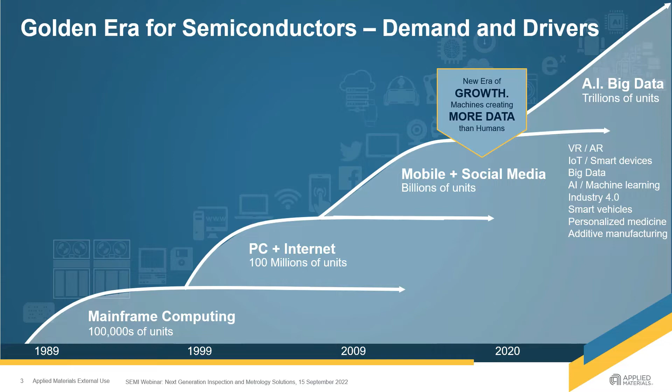The electronic devices we consume are basically composed of chips, and these chips are manufactured over several weeks to several months, depending on the complexity, with a few hundreds to over 1,000 process steps. During all these steps, it is critical to ensure that the process is within what we call the process window, so that the yield is high enough to ensure a functional and production-worthy electronic device. This is critical because one week of downtime at a 3 nanometer logic fab will result in a few tens of millions in costs. So it is critical to maintain the process within the process window.

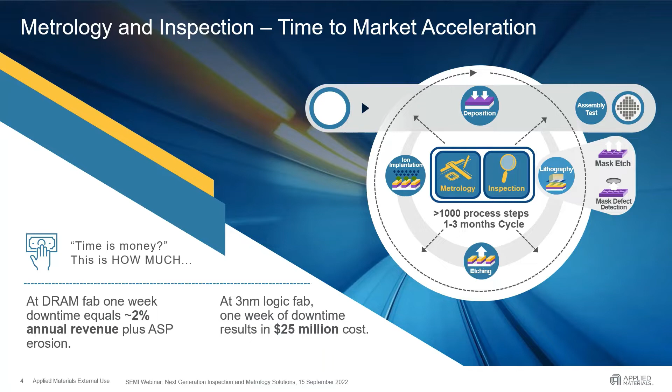At Applied Materials Israel, we develop process diagnostics and control solutions. We consider ourselves as the fab's eyes. We work at the forefront of technology to provide the wafer fab industry with patterning control and defect control cutting-edge solutions. Metrology and inspection enables chip manufacturers to see clearly into the process and accelerate time to market of their most advanced technologies.

There are many metrology and inspection challenges. Here are just a few of them. On the left, you can see the key challenge of design rule shrink. There are denser features that need to be imaged, and smaller defects become killer defects. Next is transistors, which several years ago became three-dimensional. These complex geometries have trenches and sidewalls, all of which need to be characterized. New materials were introduced, and there's no line of sight.

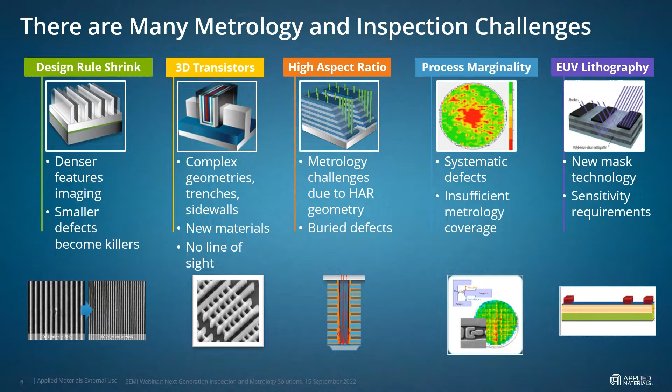So just a few words about process control. Here we can see a process window of any parameter. In this case, we chose a circuit performance example, and we can see two distributions. Here we look at the speed of the transistor. We can see some kind of variation in the speed of the transistor, and circuit performance is gated by the slowest transistor. Lower transistor variability means higher device performance. So really, the objective of process control here is to get the mean to target and control this parameter to a very tight window.

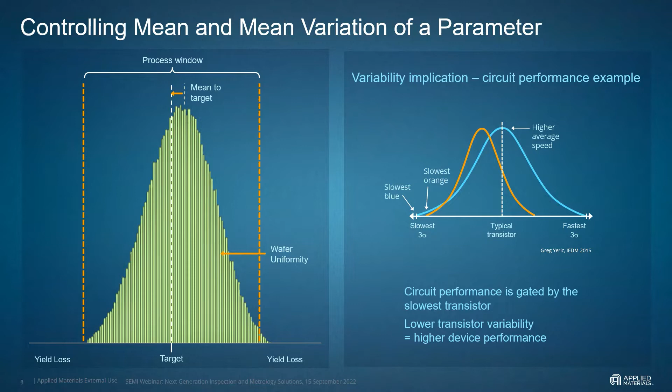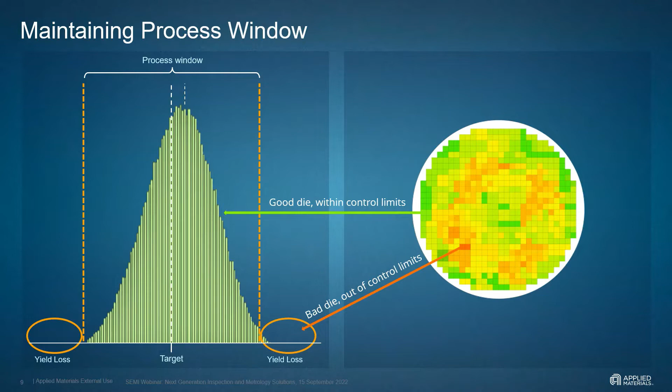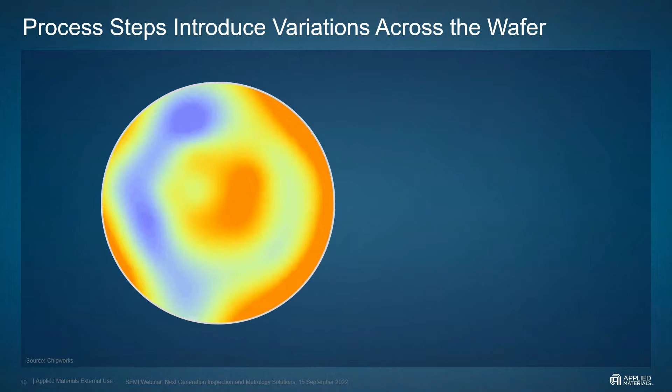Here, for example, these distributions may indicate various performance across the wafer, with the red dots indicating a bad die, which is out of the control limits, and the green dies indicating good dies within the control limits, but still there's a distribution of these parameters. So process steps introduce variations across the wafer, and in this example it's truly across the wafer, but we can also look at other spaces of variations which we need to control within.

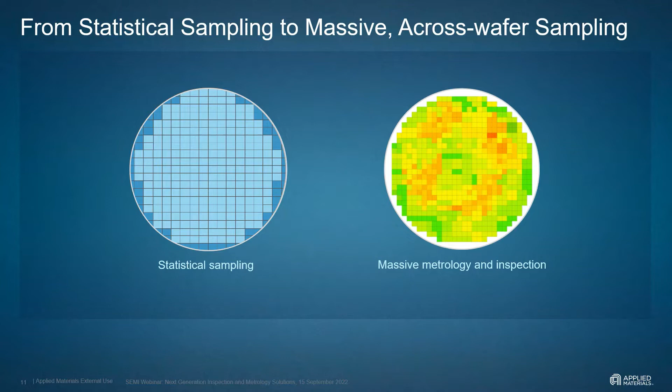So here we see two extremes. On the left, we see no sampling of a wafer - we have no idea what is happening. On the right-hand side, we see massive metrology and inspection information. Just imagine you have only a few sampling points - you can barely see the picture or understand what's happening on the wafer. But if you improve your productivity or your sampling and increase that to a level of massive sampling, you begin to view your image. Finally, you can see the big picture. So massive sampling reveals hidden information.

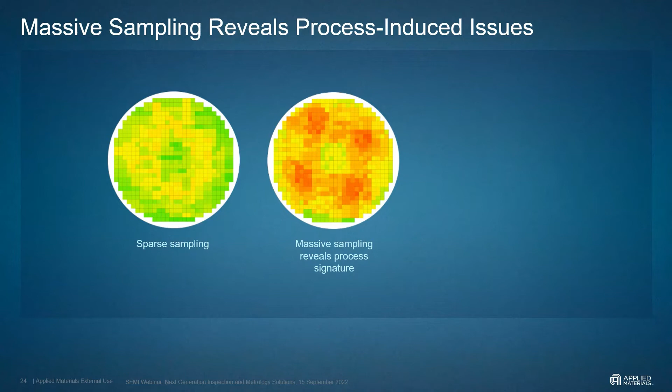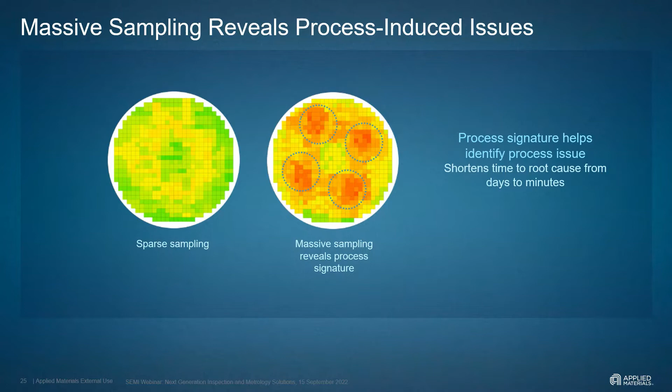So obviously, you need to increase your sampling to extract that information. Here's a beautiful example - here's a sparse sampling of some kind of parameter across the wafer. And here we see more massive sampling, which reveals some kind of a signature. The more sampling that we apply, you can see eventually a true signature, which helps identify a process issue, and this shortens time to root cause from days to minutes. So it's really important to have massive sampling to reveal process-induced issues.

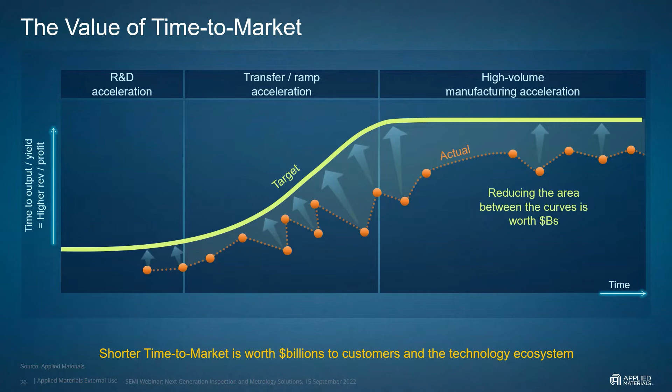Let us move now to Applied Materials Israel's main task in MADEin4. We had multiple tasks, but two were significant. The first was about optics wafer inspection, and the task was to improve optics wafer inspection sensitivity to keep up with the shrinking size of killer defects and provide new information, while improving throughput and productivity, which we did through new optics, high performance computing, and overall system design.

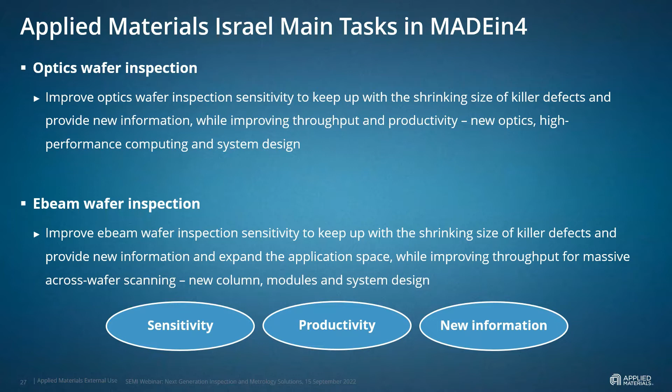The second main task was about e-beam wafer inspection, and the idea was to improve e-beam wafer inspection sensitivity to keep up with the shrinking size of killer defects, provide new information, and expand application space, while improving throughput for massive across-wafer scanning through development of a new column, modules, and system design. Overall, we improved sensitivity, productivity, and provided new information related to defectivity and metrology.

Our developments in MADEin4 were made possible through multiple collaborations. We collaborated with Leti and IMEC, who provided us with advanced wafers used to validate our developments. We collaborated with Nanomotion on stage and positioning, and with Mentor Graphics, providing them raw data for their development of new metrology through across-tools machine learning analysis.

We collaborated with ICT, which developed the e-beam inspection column. We collaborated with OKO Technologies on the development of the bright field optical inspection concept, and with ProDrive on bright field image processing and data handling for the tool's image processor.

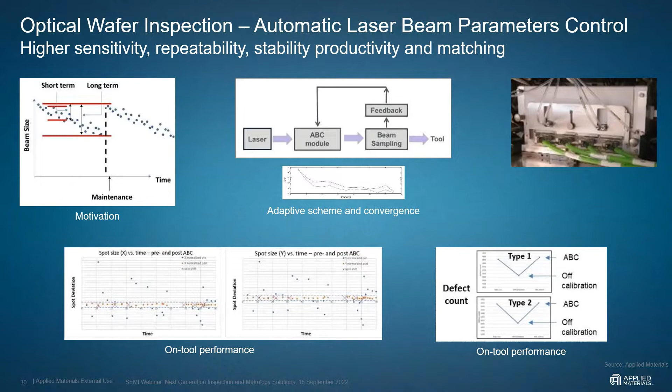You can see here defect counts for two types of defects, type 1 and type 2, at three points of measurement. The left measurement is an ideal, well-calibrated tool. The midpoint is a tool after we let it degrade for a long time, then commanded the module to recalibrate the tool automatically; after recalibration, the defect count improved. So if this is done automatically during production, we maintain high sensitivity, stability, and of course matching.

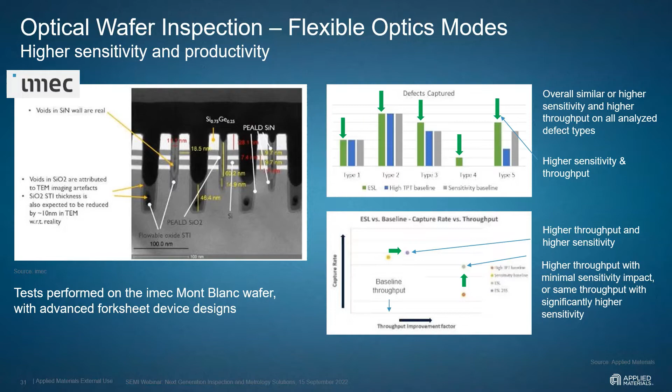Coupled to the developments of the optics, we also developed a high-performance computing system, and the main challenges here were to manage high data rate acquisition channel with incoming data rate of tens of gigabits per second, execution of parallel computer vision algorithms and advanced deep learning algorithms, massive real-time processing power to support complex algorithms, and massive data communication with advanced periphery systems and huge storage volumes.

This architecture needs to be scalable to support future algorithms and computing technology, namely hardware and software. We also need to address environmental requirements such as low power consumption and heat dissipation limitations, high reliability requirements, fab node restrictions and limitations, computing system cabinets and footprint limitations, and everything must have high cost performance in order to meet cost targets.

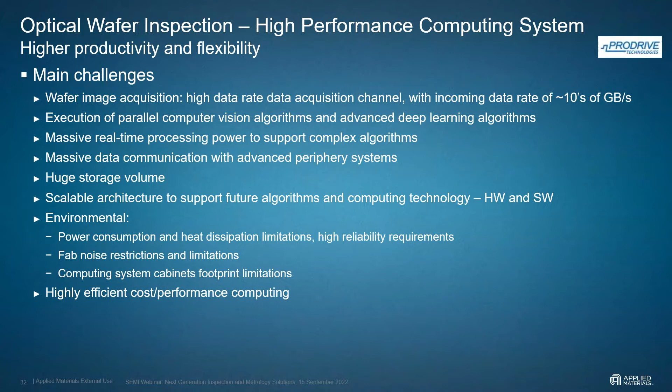This development was conducted together with ProDrive. So the methodology we took in this development was the use of off-the-shelf components, hardware and software, including open source, to accelerate development time. But the use of off-the-shelf components implies that the focus moves to a system which required optimization.

Optimization of hardware and software architectures, processing dispatching, load balancing, and the solutions included the use of tailored server architecture for the specific use case, use of accelerator and GPU for specific use case, and design of data acquisition platform detectors with off-the-shelf components. And here we can see a snapshot.

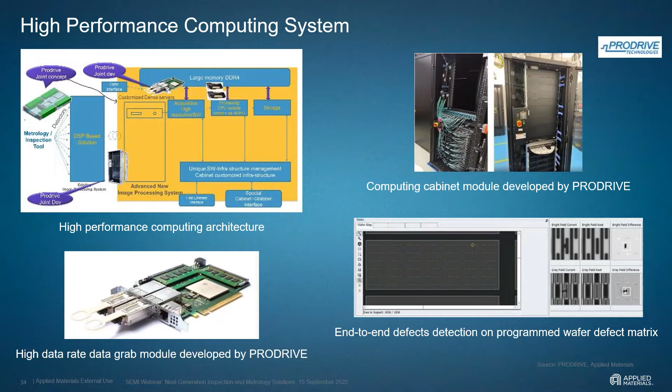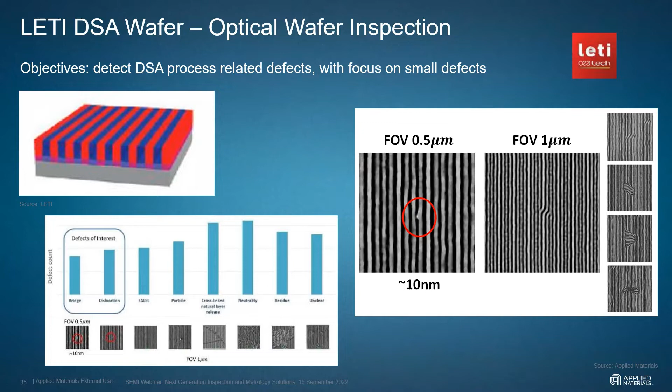In addition to this work, we also provided significant massive raw data to Mentor Graphics for their development of machine learning algorithms to provide new metrology information for analysis of data acquired by various inspection and metrology tools.

So we received 10 wafers from IMEC, and we scanned each of these wafers by multiple modes and provided the raw data to Mentor Graphics for their analysis using the various signatures that we found, which combines various metrology tools for improved metrology, and this will be reported elsewhere.

The second main task we had in MADEin4 was about e-beam wafer inspection, and the motivation here was higher sensitivity and productivity. So in order to improve the throughput or productivity, we increased the current density of the source.

And in order to improve the imaging performance, we developed a new detector, and we improved the landing energy of the electrons to provide more information about the wafer that we're scanning. The new key modules include a new column developed by ICT with new detector, new electron emitter and improved detectors. System development includes electronics and controls, motion algorithms, and new acoustic enclosure.

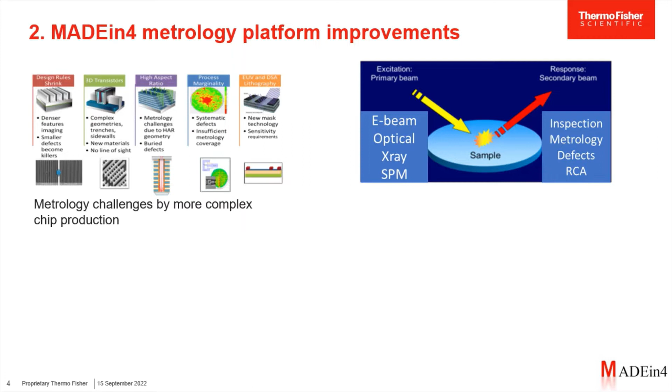In the MADEin4 project, we have been looking at metrology platforms based on electron beam, optical, X-ray, and scanning probe microscopy techniques. The main challenge is a throughput challenge: at high resolution we have to probe smaller volumes, with smaller interaction volumes, so we have less signal. At the same time, we want better signal to noise in a shorter time. To achieve this, the MADEin4 project has worked on better sources, better detectors, new modalities, improved sample handling, and a lot of automation and software development.

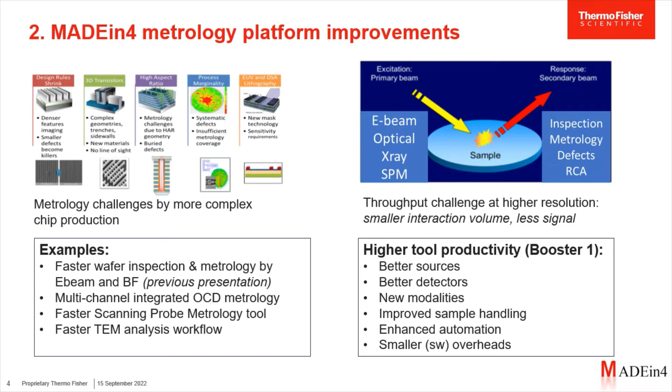I will discuss a few examples. I'd like to point out that the first example has already been discussed in the previous presentation, around faster wafer inspection and metrology tools.

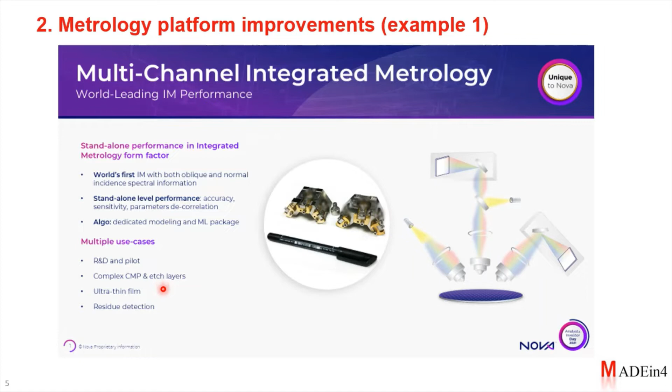The first example I want to briefly discuss is work performed by Nova on optical OCD. What they have achieved is to develop both a standalone and an integrated new OCD tool, which has added functionality of extra optical channels. This means they're able to obtain more information from a sample, and because it's integrated into the process tools, it's also faster and has faster access. They have multiple use cases, both R&D and pilot line, as well as for complex CMP and etch layers, which they are measuring.

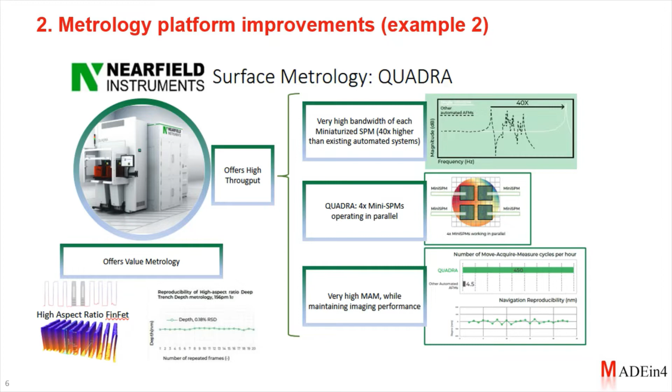As a final example, I want to spend a bit more time on the work we've done at Thermo Fisher around the TEM workflow. The TEM workflow is ideal to obtain local atomic scale information, and what we've tried to develop is to do this also at high volumes. The TEM metrology workflow starts with a wafer, then uses a dual beam device to cut very tiny TEM lamella out of that wafer - tiny meaning on the order of microns. Those lamella are then transported into an electron microscope, which yields all types of different information, including both dimensional metrology and compositional analysis.

The first challenge to address is that those minute TEM lamella need to be transported from one tool to the other. In the framework of the MADEin4 project, we developed, with the help of the SEMI organization, a standardized TEM lamella carrier, which is indispensable for automation, enabling further automation of the transport of these TEM lamella from one tool to the other.

A second challenge addressed concerns automation. To appreciate that challenge, it's good to explain that there are many different questions being asked of the TEM tools - this could concern dimensional metrology, inspection, or compositional analysis using energy dispersive X-ray, and each customer has different questions for each sample. So what we have to do is automate the acquisition of data while retaining flexibility for the customer.

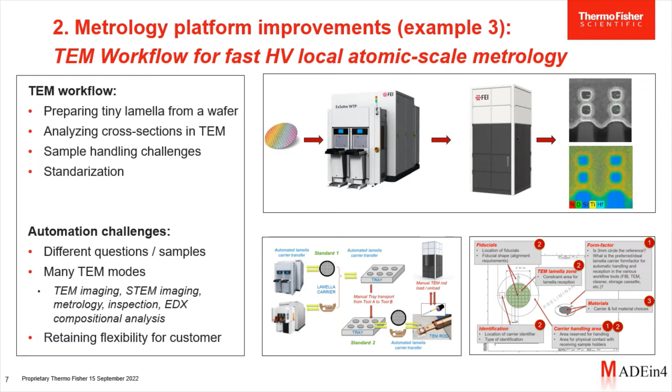The work in the MADEin4 project has led to a dedicated application software we call Smart Automation for the TEM workflow. This Smart Automation doesn't only automate the acquisition of the different types of data desired, but more impactfully also helps automate the setup of experiments, empowered by machine learning. After the process is started, the user is guided through a series of steps, questions, and automated image acquisition to set up the experiment.

This ranges from imaging the TEM lamella as a whole at very low magnification, aligning the TEM lamella with respect to the electron beam, and then zooming into the device line - in this case, a gate-all-around structure. Then the experiments are further defined to either acquire TEM data or, if required, acquire STEM data using a scanning probe, which can then also be used to acquire energy dispersive X-rays to generate compositional maps and profiles.

Once the experiments are set up, an experiment card is generated in which all the data are put together to really run the experiment.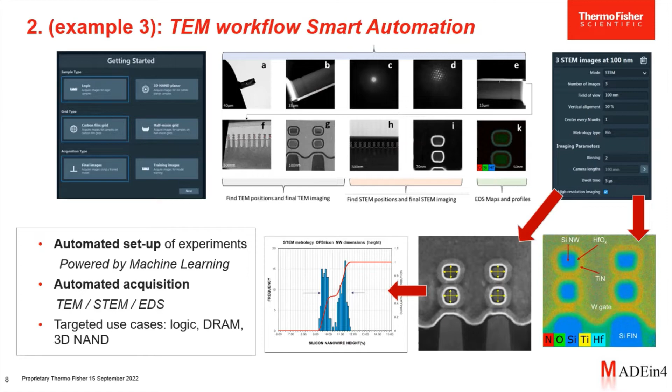As a final topic for this presentation, I would like to touch upon the use of metrology platforms in industry environments.

The way how this can be viewed is to see them as cyber physical systems. They are cyber because they're connected in their software to other tools and to the fab host and things like that. But they're also physical — we're not talking about web applications.

In the framework of MADEin4, we have worked on various parts of this evolution. In the previous slides, I already showed smart acquisition and smart tool setup, which relates to visibility and transparency, so that the user knows what is going on in the tools.

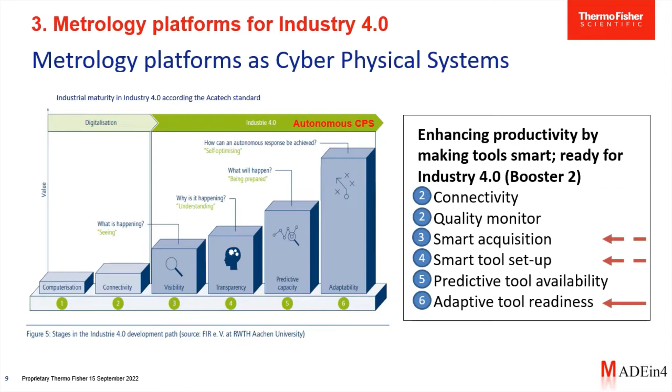In the final slide, I would like to briefly touch on the area of adaptive tool readiness. Tool readiness is a very important part of the cycle of running jobs, checking the status, and if the status is not okay, measuring and validating what the status is, then performing corrections on the tool. Report on those corrections — if they cannot be done automatically, surface that and call for help. If the report is positive, the next job can be run.

I already explained that the TEMs are very versatile tools, meaning many different parameters need to be checked. We have identified about 18 critical tool alignments which need to be checked on a daily or at least a weekly basis. By running them automatically, we're also able to be less dependent on the operator skills needed.

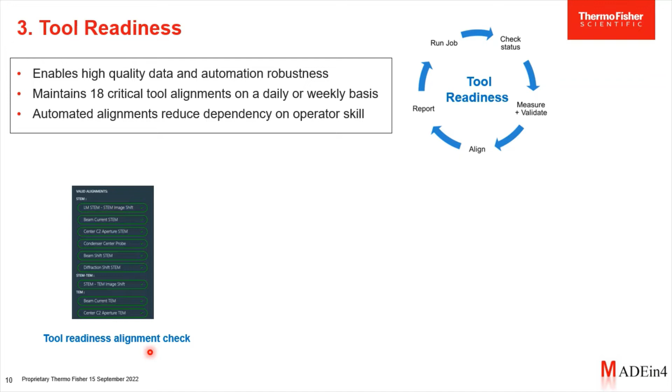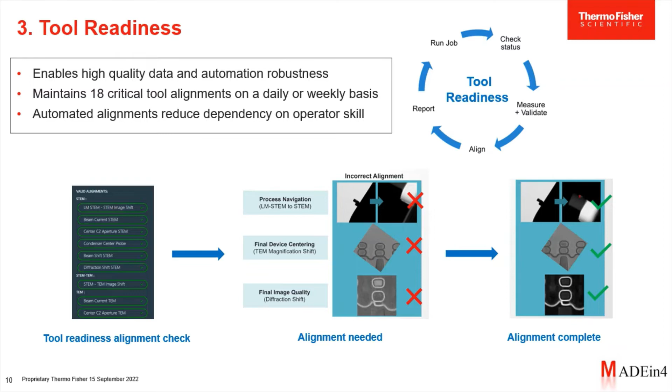The tool readiness checks are adaptive, and that is an important point. It's not that all parameters are aligned once a week, but the alignments are called by the experiment. So if a certain experiment is being performed or wants to be performed, it automatically checks whether alignments are needed, for instance for process navigation or device centering, or whether image quality was still sufficient from the previous job. If the alignments are not correct, those specific parts are performed until correct, and then the tool is ready for further use — this is adaptable tool readiness.

This has led to an automated STEM metrology workflow, which we sometimes refer to as fourth generation automatic STEM. I've explained that this uses smart automation, dedicated application heavily using machine learning, but it also calls upon smart alignment features and tool readiness in an adaptable way.

As a result, more consistent data can be formed, and there is constant monitoring of data quality. We're able to perform dimensional metrology with less than 1% accuracy. This means higher volume TEM data can be obtained much faster, making these tools also relevant and important, together with other tools, to work in an Industry 4 type environment.

This leads me to the conclusions on the metrology platform developments. I've shown that the main challenge which has to be addressed is to enhance the productivity, but at the same time address the higher complexity of the samples under investigation.

I've presented a couple of examples where significant improvements have been reached in platform development: not only the TEM metrology workflow of Thermo Fisher, but also the inline and integrated multi-channel OCD tools of Nova, and the multi-head scanning probe microscopy tools from Near-Field Instruments.

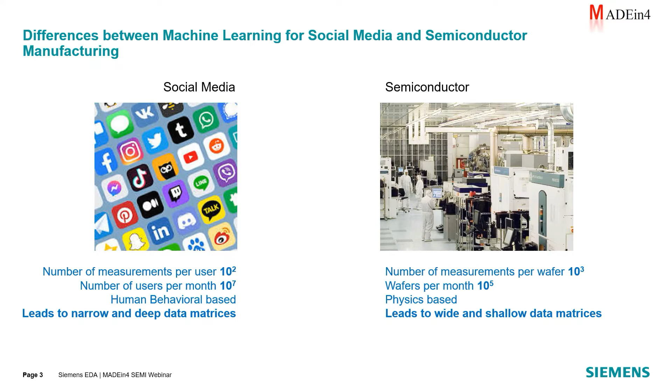The first example is for a single process, in this case chemical vapor deposition. We want to have a model that is able to describe how a distinct set of populations in which we have low thickness, medium thickness, and high thickness behave, because there are three distinct technology nodes that are being manufactured within the same manufacturing tool. This provides a benefit in the sense that we can actually utilize the behavior of all of these products that are being processed at different technology nodes in the same tool and basically leverage the information across each other.

We demonstrated what is the benefit of incorporating design features — in other words, the ability for the model to learn what happens in other technology nodes or from other different products in order to fully characterize the process.

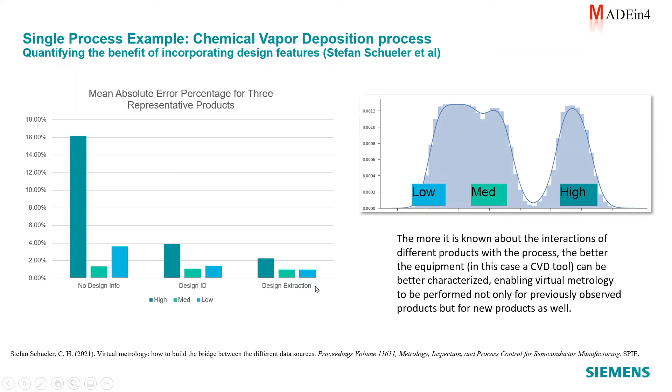This is another example. We want to identify the root causes of abnormal conditions. After we have generated such models, we can identify what are the characteristics or what are the parameters that lead to low thickness conditions or high thickness conditions.

Machine learning techniques like SHAPley allow us to determine what the main contributors are. While the first two contributors correspond to a previous metrology measurement and a process parameter, you will see that what makes a product have low thickness condition depends on certain design parameters, metrology parameters, and process parameters.

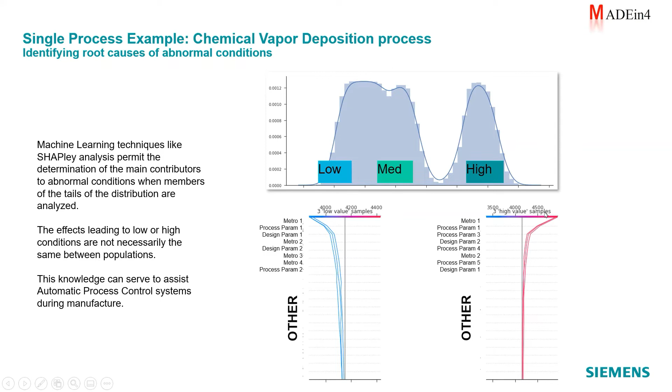But this order changes when we look at some of the higher conditions. In other words, the characteristics that lead to a low thickness or a high thickness condition are different. This allows us to identify the root causes of the conditions leading to out of control thickness.

We describe how feature engineering is paramount in order to successfully utilize all of the information present. In this case, for an electroplating tool, we need to undergo feature engineering, understand the physical behavior of all those different parameters, extract characteristics relevant to them, and then create traces within time of those newly extracted conditions.

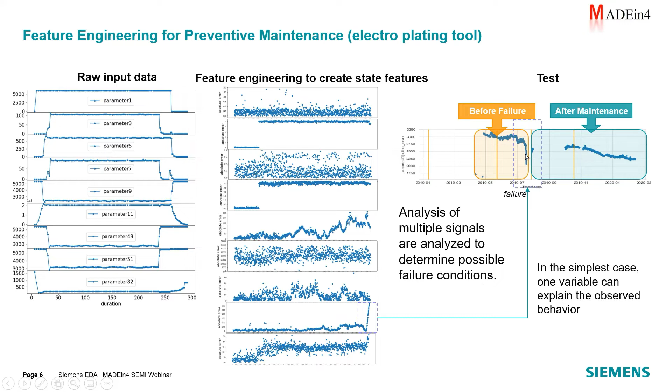In the simplest of cases, one variable can actually explain the observed behavior, and therefore that can serve as the indicator that preventive maintenance needs to happen. Not all systems are as simple.

In the case of a chemical vapor deposition tool, we have raw input data that has been collected. We perform feature engineering to characterize how that raw input data changes over time, and that creates a trigger model that is able to identify and forecast when the machine will actually be out of control.

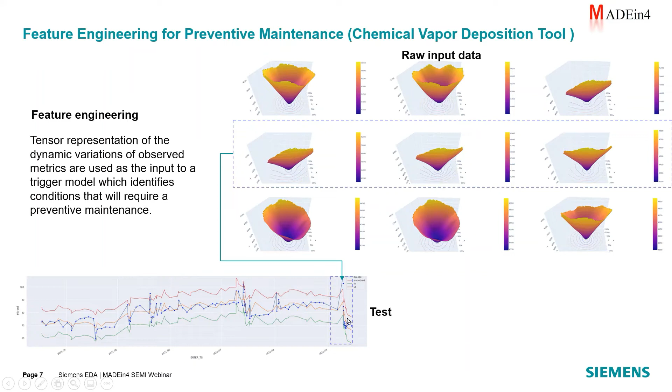As data is being collected during manufacturing, you're going to have some amount of data. There is going to be a delay in which this data is then processed from the point of view of training. During prediction, a model is used to monitor the behavior of that particular process, but when new data becomes available, that should trigger the characterization of new models.

One of the biggest questions about machine learning is, how do we know that we are improving our model? We can perform an analysis of the contributors.

What is the difference between these two columns, pre-MADEin4 and post-MADEin4? In pre-MADEin4, the state of the art is that virtual metrology relies on individual models that are interpolating within those types of measurements. So we will have, for example, one metrology step, another metrology step, another metrology step that are not fully measured.

However, when we want to make a prediction on the e-test, what happens? What happens is that we don't necessarily have a full stack. We do not know, in that particular region of the wafer, what some of the other observations were. With the work we have done in MADEin4, we can actually construct a full description of how every single process step is virtually constructed.

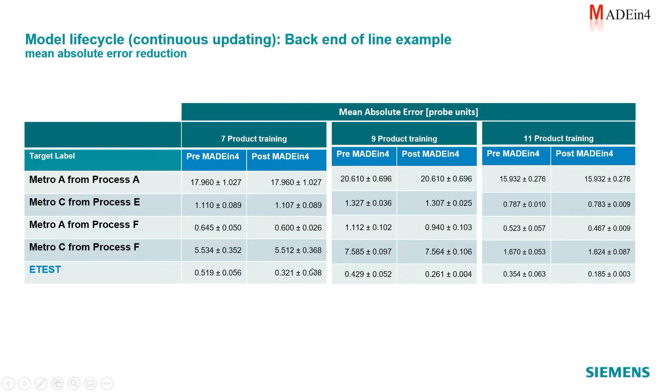That means that for every single point we have at the end, in this case the electrical measurement, we have a full stack of the different measurements accounted for. We can see how, from the point of view of e-test, the error decreases from 0.3 to 0.26 to 0.18, but also the confidence interval gets tighter. Something that, again, illustrates this problem of very low sample conditions.

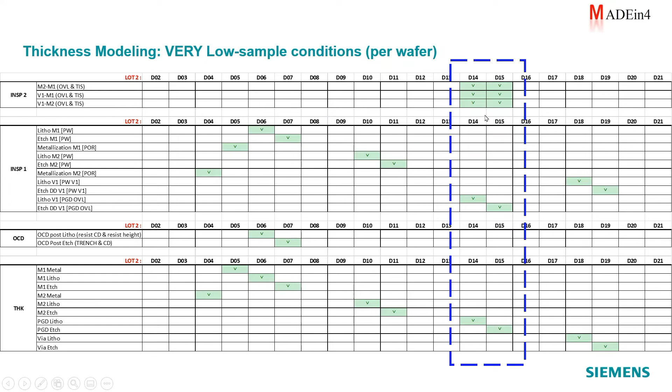We want to generate a model for these 2 individual wafers that explains what the thickness is, and we're going to consider what happens when we add information from inspection tools. What we can already start seeing here is that while some thickness values improve and others degrade, the improvement or degradation in model quality under these low conditions is an indicator that other effects are present.

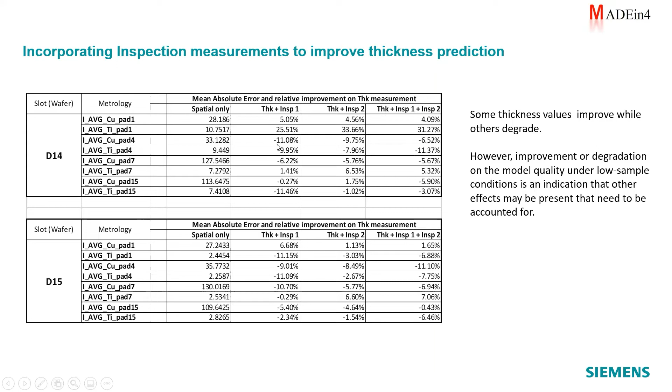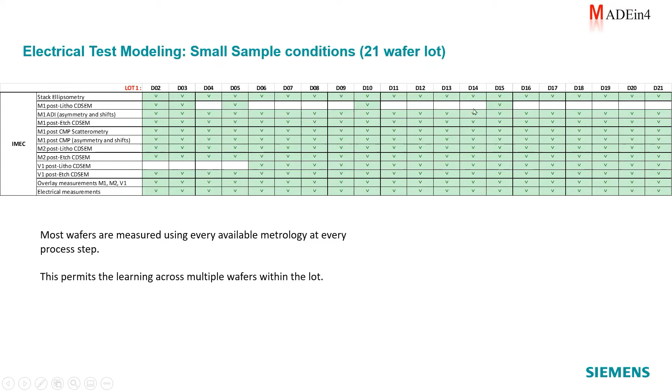So let's take a look now at a case in which most of the wafers are fully measured, and this permits leveraging learning across multiple wafers within the lot.

Now, what happens if we have a large sample size? When we have thousands of wafers, we perform a very similar analysis in which we want to take a look at, after the full process sequence, what are all of these different targets or probes that need to be extracted that are able to identify what is the benefit in the electrical test.

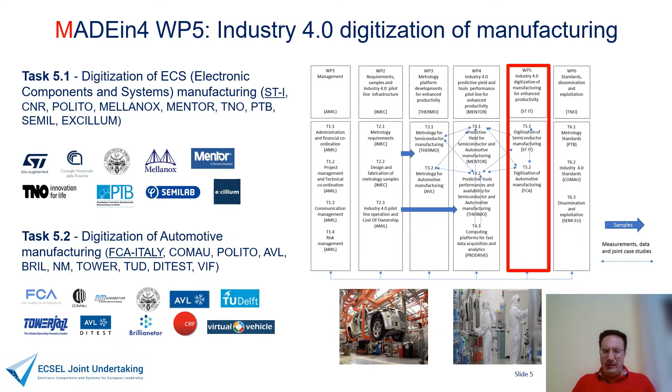In any case, we have the opportunity to collaborate tightly with a lot of partners coming from other work packages. For example, work package 3 for tool and metrology partners, work package 4 regarding development of new algorithms and methods, and it's very important also the interaction inside work package 6 regarding synergy and standardization.

For our work package, the main objective is focused on IoT methods and new metrology tools. This is a task very important to increase productivity, but first of all to speed up the development of new products and new technologies.

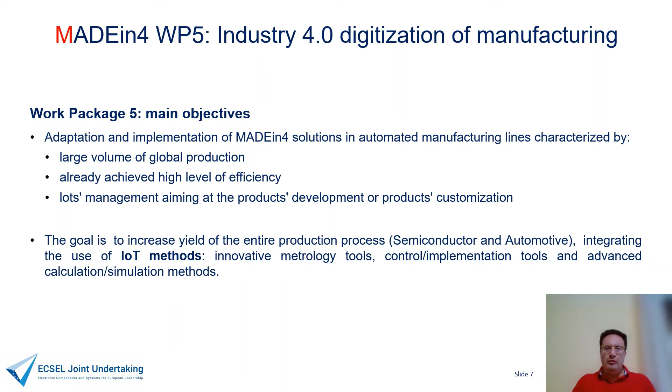In particular, regarding work package 5.1 for semiconductor environment, I have the opportunity to describe some use cases and the main results that we achieved.

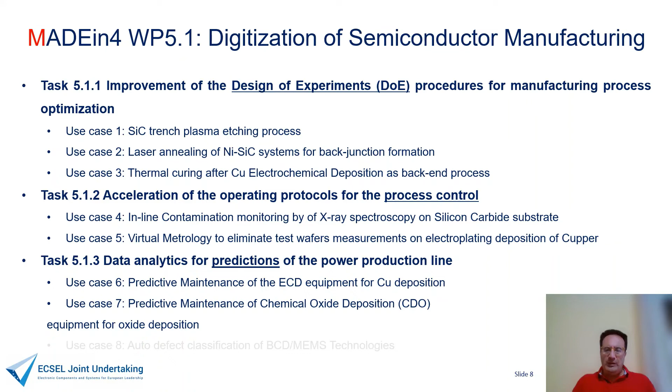In terms of improvement for design of experiment procedures, it's very important to take into account that when we talk about new technology, new substrates like silicon carbide, it's very important to reduce the real tests needed to develop a DOE. For this reason, it is mandatory to develop and increase the efficiency in terms of virtual DOE.

For this reason, we analyzed 3 use cases regarding silicon carbide trench plasma etching, silicon carbide nickel silicide laser formation, and thick copper electroplating deposition. For these cases, it is very important to reduce the amount of tests we have to perform, because of the cost, but also the time needed to perform all the tests and evaluation.

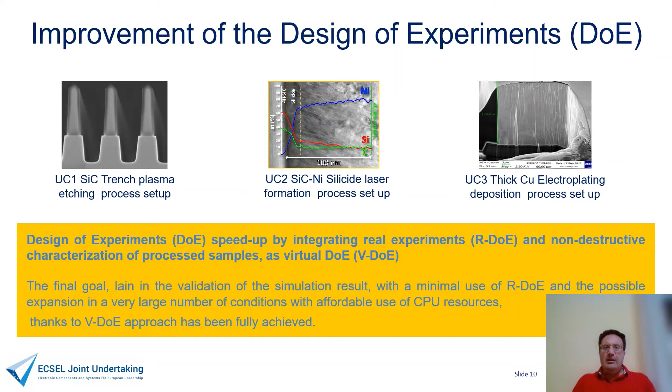The result was impressive because we reduced by 10 times the number of tests, and we also obtained this type of results, including hardware usage in terms of CPU time needed to perform these simulations, which is reasonable for our scope.

For the first use case regarding silicon carbide trench plasma etching process, we got great results in terms of the correspondence between simulation and real case. We had the opportunity to take into account the full structure, including the photoresist residuals, the hard mask with silicon dioxide, and the silicon carbide. In this case, it's possible to reproduce at best the structure and the profile that we have at the end.

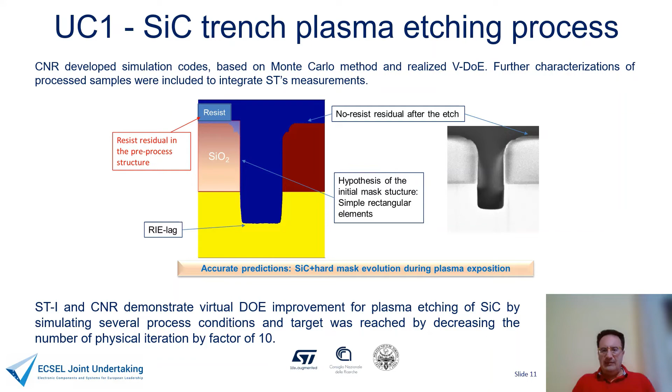It was very important because with the support of our partner, it was possible to define the process, characterize the process window, and optimize the process. All these results were obtained while reducing the time and reducing the number of tests needed to analyze the whole opportunities and variations that we can and have to take into account in this process.

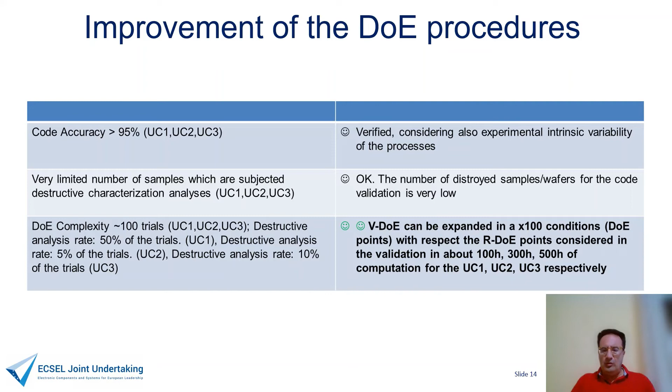About the development of the metrology tool, it was very interesting because we faced the difficulties of analyzing some elements present as contaminants on the surface of silicon carbide substrate, like vanadium and titanium, while obtaining results in a reasonable time frame. This is important because usually this type of analysis is performed only offline and is not present inside the standard production flow, due to the fact that the duration of the measurement is high.

The measurement impacts more than a couple of hours. But CNR, Bruker, Excillum, and PTB worked on this topic, starting from the preparation of the reference to define the tool. The key point was the introduction of a new source, the AgKa source, that allows us to detect this type of elements and at the same time speed up the measurement itself.

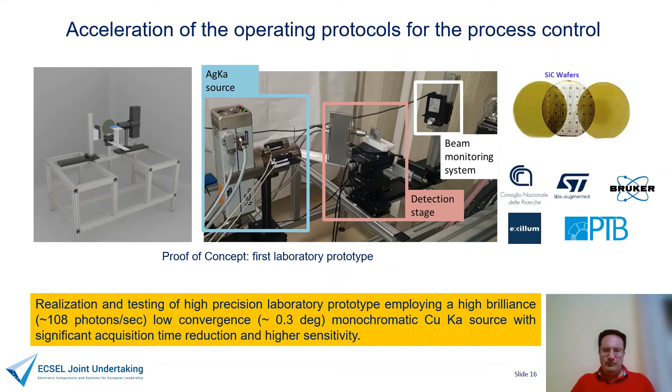Another important topic is regarding process control. In this case, we analyzed equipment for copper electrochemical deposition. The structure of the tool we analyzed is formed by 6 process chambers, so in practice we measure 6 wafers for each lot. Consider that when we talk about a lot, I mean a box with 25 wafers, so typically for each lot we measure 6 wafers.

But it's very important to reduce the frequency of the measurement, so the objective is to no longer measure every lot. Another important point is related to obtaining a prediction on the remaining wafers inside the lot, because it's important to intercept just in time some drift that could be generated by oscillation in equipment parameters.

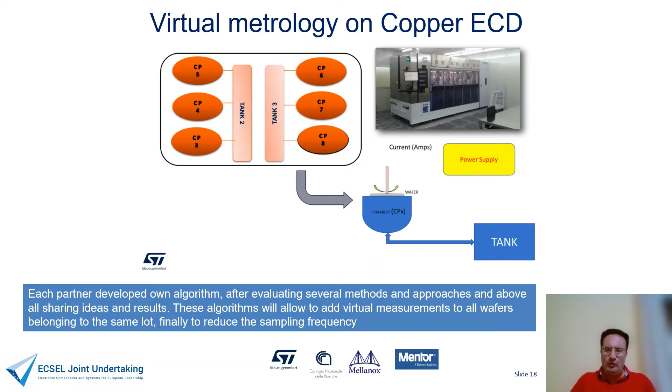But that's not the only gain we obtained, because analyzing different algorithms and different approaches represented a great opportunity for us to analyze a different architecture, so to verify not only the efficiency of the algorithm but also the efficiency of the architecture. For us it was an opportunity to understand better the performance of each approach and the benefit that we can take from each of them.

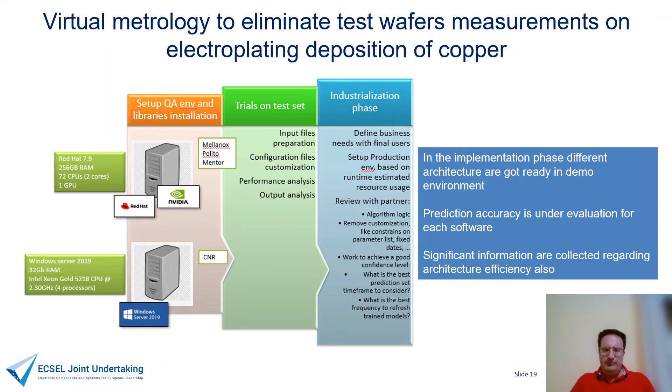For sure, predictive maintenance is another important topic. In general, the importance of predictive maintenance is based on remaining useful life. This is an important indicator for the parts under analysis when we have no other way to catch a drift, a problem. This is typical when we have damaging of the parts in a sudden way, so it's not possible to stop the tool before the problem.

In this case, we have no clear message from the machine and no signal from the external measurement. So we only, when the problem appears, have the opportunity to verify what happens on the machine. So it's very important for this case to put in place a predictive maintenance.

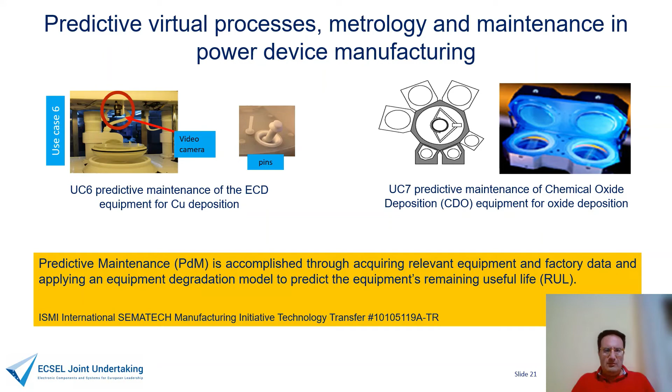So, you can see the tool that we're talking about and the process chamber. In this case, the pin is the part that is directly in contact with the edge of the wafer, and the risk is rapid damaging of this part.

Thanks to our partner, we analyze the image and take under control not only the problem, the issue that can happen, but also its persistence, because we verified that sometimes a water drop, humidity, or other different particle can seem like a failure on the top of the pin, but really is not. For this reason, thanks to this approach, it's possible not only to catch the problem, but to reduce significantly the number of false alarms.

Consider that at the beginning we put in place a time-based PM, preventive maintenance, so we replaced this pin every time, even in good condition, which brought an increase in terms of total downtime and also in terms of cost, for sure. Now it's possible to take these parts under control and avoid this waste.

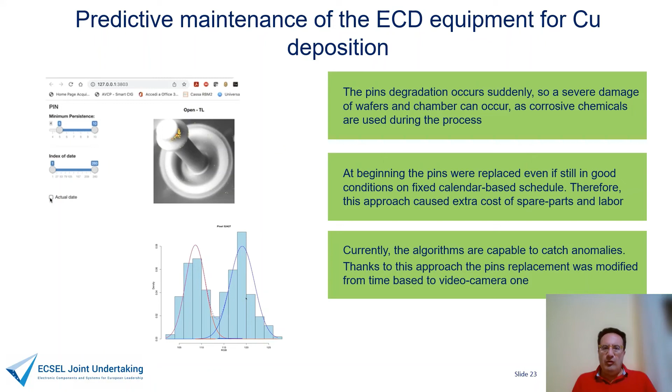For the other case, regarding chemical oxide deposition, we analyzed two different tool families, the Centura platform and the producer platform. The distribution of the gas flows is the same, and for both equipment a big problem could be clogging in this part. So at the end we have an anomalous thickness that is the result of our process.

So at the end, the thickness of the oxide that we grow on the wafer is not the value that we want. To avoid this, thanks to the machine learning approach, it was possible to intercept the problem in advance and also reduce the false alarms.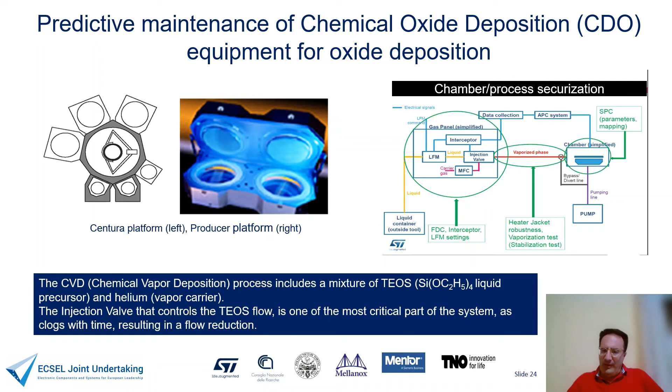Consider that in this phase we are testing our algorithm, and we plan to release it in production in a couple of months.

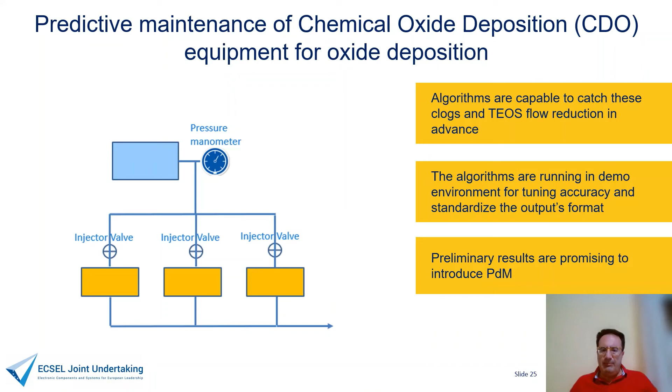The last point is very interesting and is related to data interoperability for predictive maintenance. Thanks to MADEin4, we have the opportunity to analyze and test the same software, for example used in the automotive domain, to intercept a potential issue in semiconductor, and vice versa.

Vice versa, we used the AVL software developed for automotive for our reactor. The conclusion was interesting because, considering that for sure we have different database distributions, different sensors in terms of quality and number of sensors itself, at the end it's possible to use the same algorithm, the same approach, in a totally different domain. This is also another opportunity that we can exploit at the end of the project.

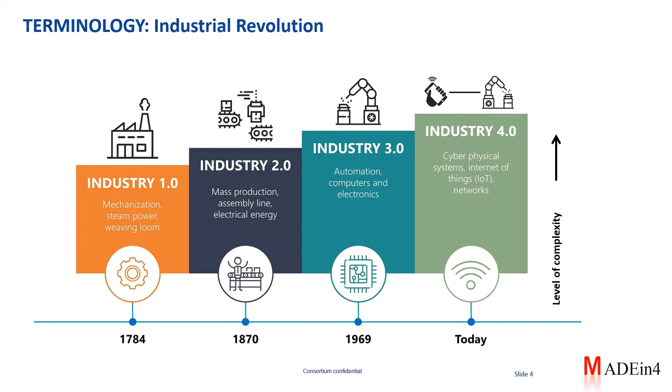Another term which is widely used in Industry 4 and highlights the complexity is cyber physical system. What it means is basically an interaction of physical items and computing at all levels - sensors, actuators, sub-assembly, production parts, you name it. And in the heart of this CPS lies the core information center.

So now we have many sensors to gather data, and we get a tsunami of data. Data is the new oil. There's no problem to gather data. Sensors are being added constantly in both brownfield and greenfield. But what is missing in this slide? What do we do with all this data? How do we convert this tsunami of data into useful information?

The missing link is how to translate vast amounts of data into useful and manageable information. If we assign context, to be more precise, to all the bits and pieces of data that we gather, we can get useful information. So context is what it's all about. It allows us to build the relations over time and the relations to each other.

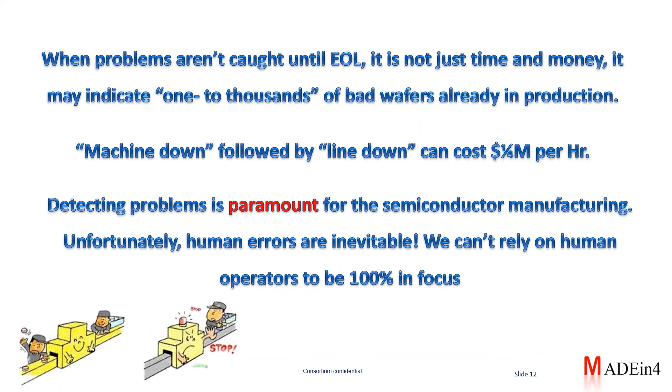But if the faulty tool is at the beginning of the production line, it means that now we have the whole production line, which is 2 to 4 months, if you recall. We have thousands, if not tens of thousands, of bad wafers in the line. It can be a catastrophe.

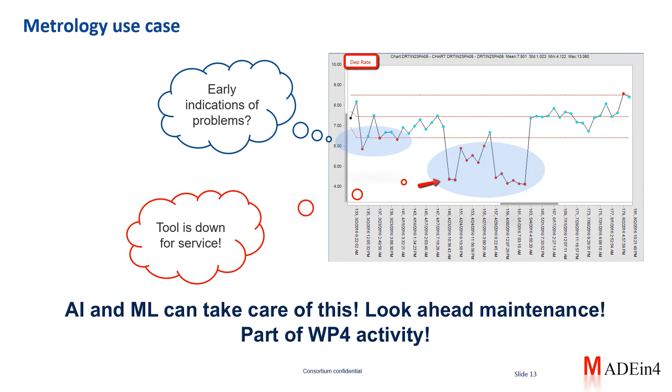Moreover, we would like machine learning to adapt to this scenario and perhaps even alert before we lose control. Machine learning can help us avoid those points at the beginning that go below control. So you can see how critical it is to catch problems as early as possible.

Now let's talk about some of the sensors that are at the peak of the industry. And by the way, sensors from silicon are in some way a gift from God and nature. We are so lucky that the silicon crystal is sensitive to photons. The energy from photons impinging on the silicon crystal easily separates electrons from holes. This phenomenon allows us to create the digital camera.

Now, machine vision is the most mature solution used now in the industry. So far it's being used to detect fast-moving objects, faulty products, barcodes, etc. It can almost replace any manual vision in production. We can now harness this ability to recognize smaller objects much faster.

Now, to demonstrate the conversion from data to information, we've selected a special use case from the automotive industry. The problem in this use case is to detect a faulty welding spot on the driver's door of an Alfa Romeo prior to final assembly. We want to catch those defects in the doors, and if we catch this defect, we scrap the door. It will not move into assembly.

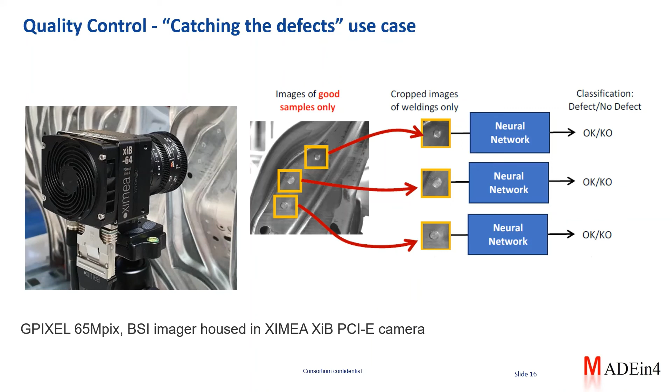In this final chapter of my presentation, I'll talk about some of the advanced sensors in the market.

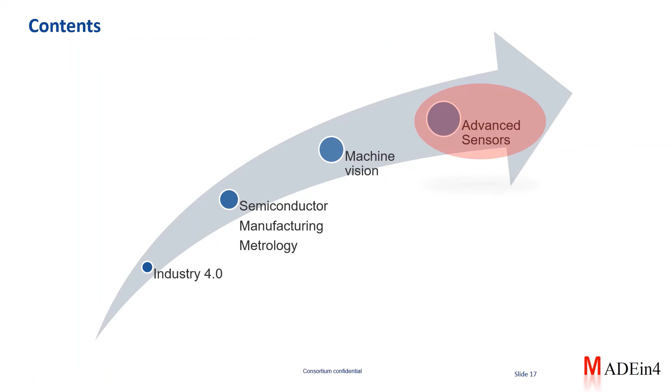In the world of the digital twin, which attempts to represent the shop floor in a real-time cyberspace system, sensors are the key elements in the ability to provide a virtual representation of the physical element in this concept. What kind of sensors? Primarily image sensors in visible light, shortwave infrared, UV, anything. The main challenge is to transfer the data as quickly as possible, map the scenery, and transfer back only useful information.

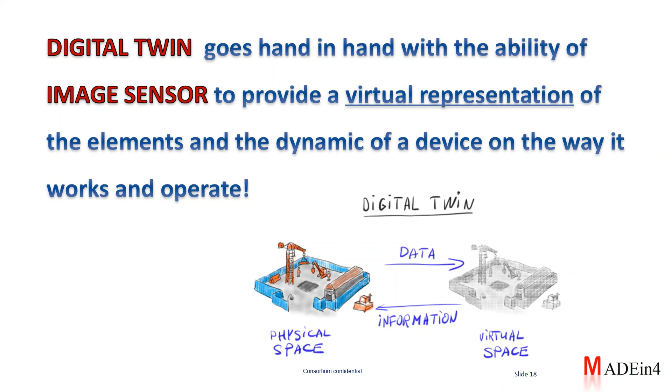Now, today's high buzz for 3D mapping are the VR and AR goggles. VR stands for virtual reality, AR stands for augmented reality. Advanced OLED technology and 3D mapping technology paved the way for both VR and AR in the digital twin.

Reducing the pixel size makes it possible to move the OLED display chip closer to the eye, thus reducing the VR goggle size—it allows us to make it closer to the eye. Now, time-of-flight sensors are used not just for 3D mapping of the surrounding space, but also to monitor eye movement. So, as you saw, I threw in another term: structured light and TOF, which means time of flight. We will discuss that in the next slide.

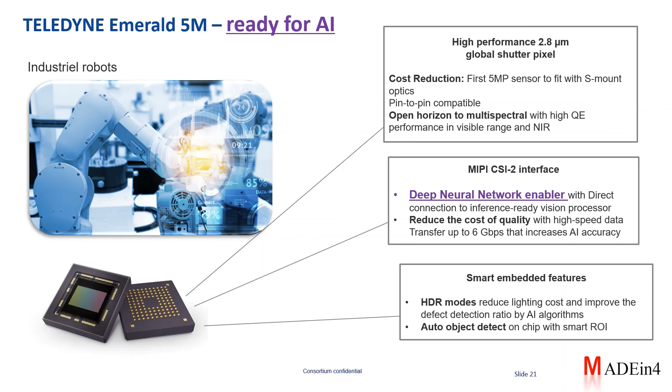Introducing a sensor to the automotive industry is like finding the Holy Grail. There's a large span of solutions for the automotive industry, but no single solution or imager that covers everything. Only a combination of these sensors can give a holistic solution.

Situational awareness in automotive is mostly achieved with image sensors. Among the sensors already in use are high dynamic range sensors, ITOF, DTOF, SPAD, SWIR imagers, etc. This is something I already mentioned in one of my earlier slides.

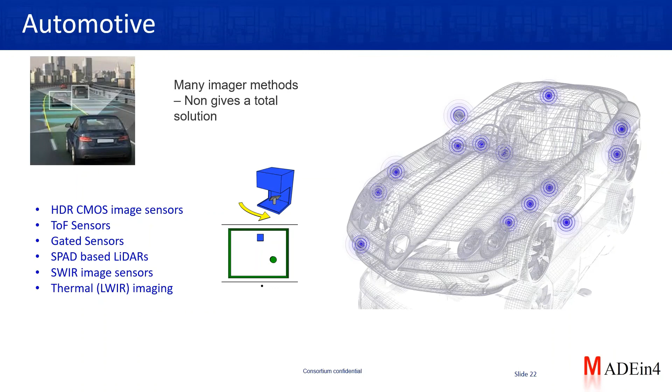Another term in industrial vision: what we need is speed and accuracy. Industrial imaging spans from low-resolution barcode readers up to LCD screen quality images with very high resolution of 80 to 100 megapixels.